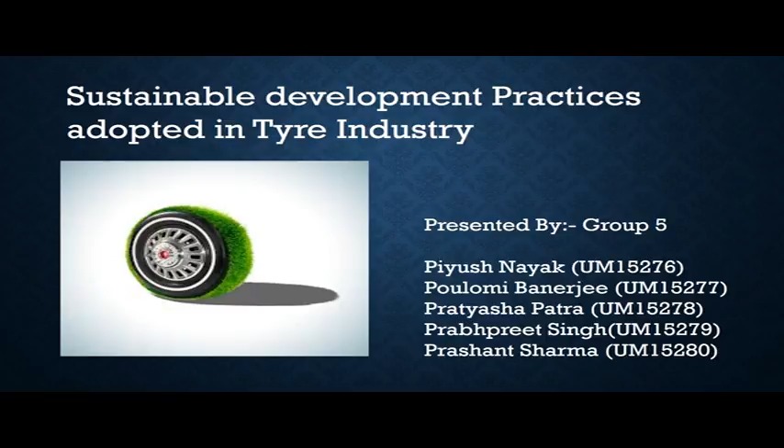Over 1 billion tires are manufactured worldwide across 450 tire factories in the world, and the major consumption of the tire industry is natural rubber. Their different uses are industrial products, conveyor belts, automotive products like fan belts, and latex products like rubber gloves.

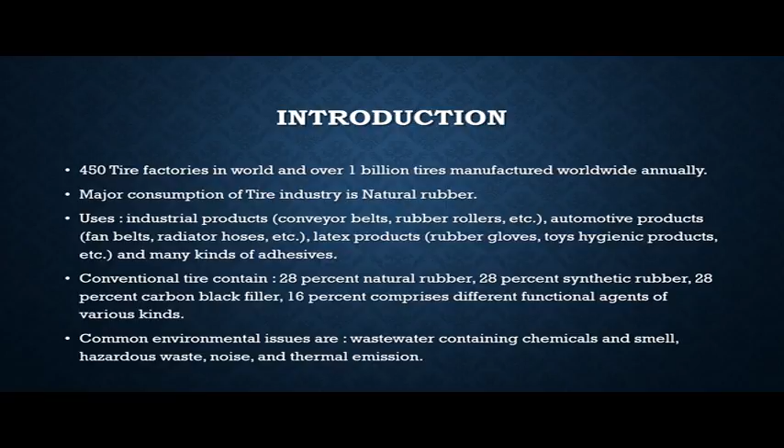The conventional tire contains 28% natural rubber, 28% synthetic rubber, 28% carbon fillers, and the rest are functional agents. The common environmental issues are wastewater containing chemicals and smell, hazardous waste, noise, and thermal emission. Different ingredients of the tire are rubber, carbon black, metal, textile, zinc oxide, sulfur, additives, and carbon based materials.

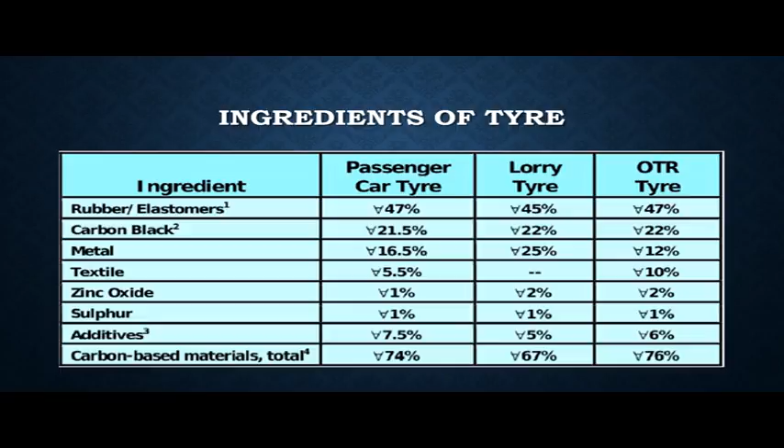Now talking about the life cycle of a tire, in the production phase we talk about the raw materials, their source, and the manufacturing process, and the key properties of the commonly used chemicals and their exposure scenarios, and the use of nanomaterials in tire manufacture.

In the tire use phase, we talk about the fundamental measurements of the tire and road wear particle, the distribution of the TRWP in air and their impact on water and soil, and the toxicity of the TRWP.

And then we go to the end of life where we talk about the different management practices like reduce, reuse, recycle - the 3 R's - and expanding it to the developing economies.

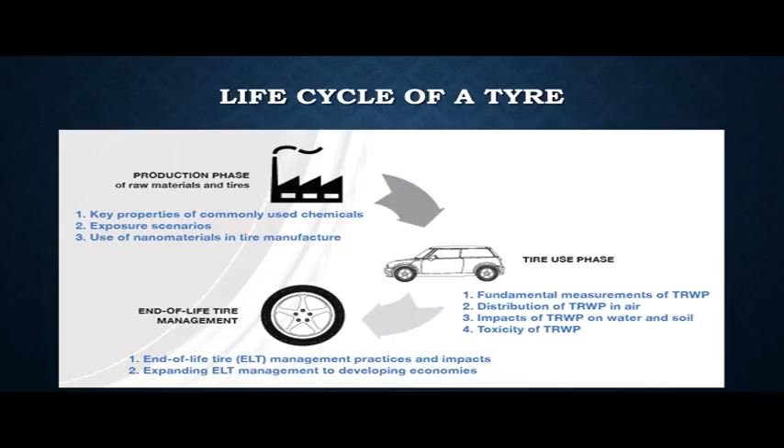Major areas which they impact are the production phase, where we talk about raw material sourcing, and the use phase, where we talk about tire and road wear particles and tire roll resistance, which affects energy use and the greenhouse gas emissions that result from it.

And in the end of lifetime management we will talk about reuse, where 85% of the reuse of tires is done in developed economies, which needs to be taken to the developing economy.

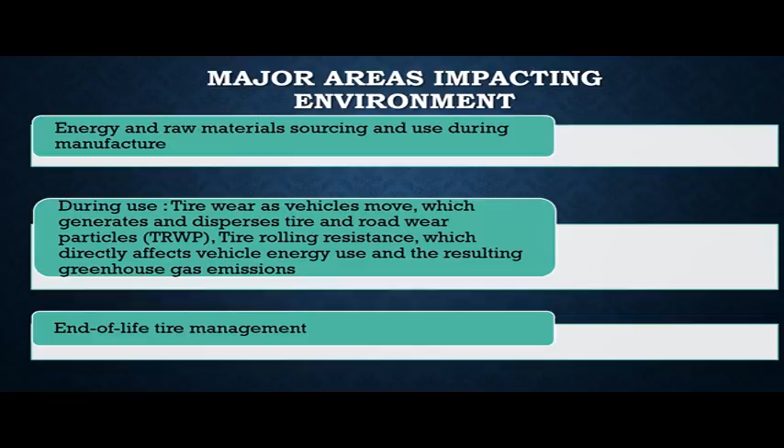Now let us come to the tire companies following sustainable practices. First is Apollo Tyres Limited. Apollo Tyres Limited India started its business of manufacture and sale of tires in 1972.

The company has its corporate headquarters in Gurgaon, India, and its manufacturing units in India, Hungary, and the Netherlands. It markets its products under two global brands, Apollo and Vredestein, and sells them over 100 countries through a vast network of branded, exclusive, and multi-product outlets.

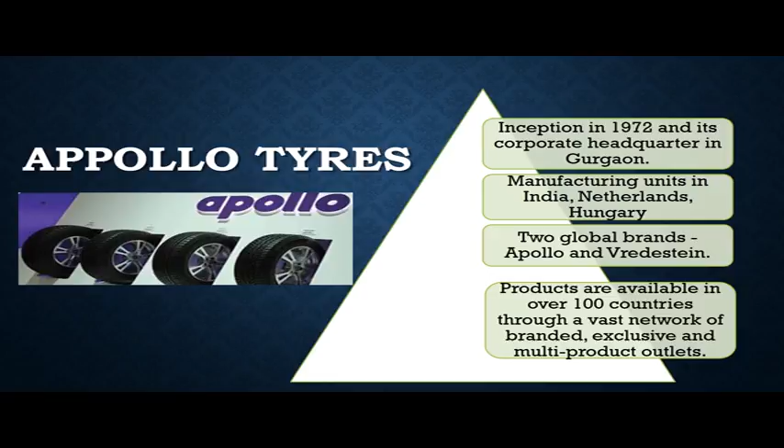Now let's come to the sustainable practices followed by the company. First is Green O Bin paper recycling. Under this initiative, they focused on conserving four key resources: energy, water, waste, and biodiversity. This initiative is run by the employees themselves. It also attempts to create behavioral change which goes beyond the workplace and leads to employees adopting it even in their personal lives.

Next is Apollo Radial Service Assistance. This aimed at engaging customers to optimize operational efficiency in their fleet. A specially trained and qualified person was allocated to the fleet to make standard checks like vehicle inspection, scrap tire inspection, inflation, etc., which led to enhancement in 15 to 20%.

Weight reduction: they have introduced a new product line, Quatrac 5, which reduces rolling resistance by an average of 10%. Reduction in rolling resistance leads to direct reduction in fuel consumption.

Next is green compound technology. Apollo tires have introduced a new tread compound with carbon black reinforcement whose performance in regards to rolling resistance is similar to silica tread compound.

Next is employee engagement on environment sustainability. A comprehensive employee engagement on environment awareness and sustainability program was designed in partnership with Centre for Environmental Research and Education. This program was aimed at promoting environmental sustainability through formal education and mass awareness programs.

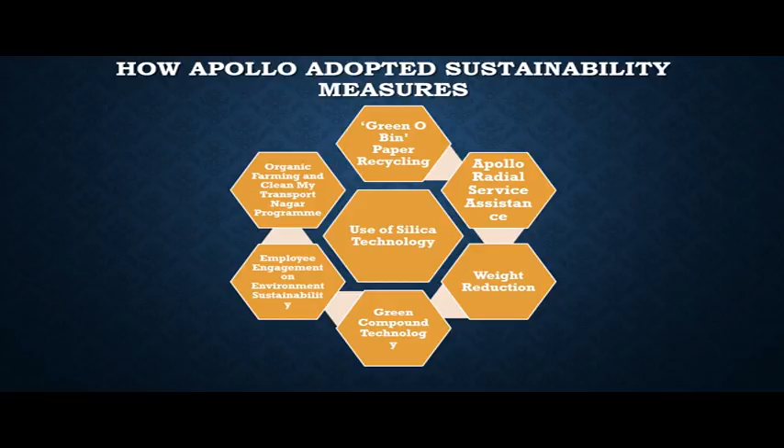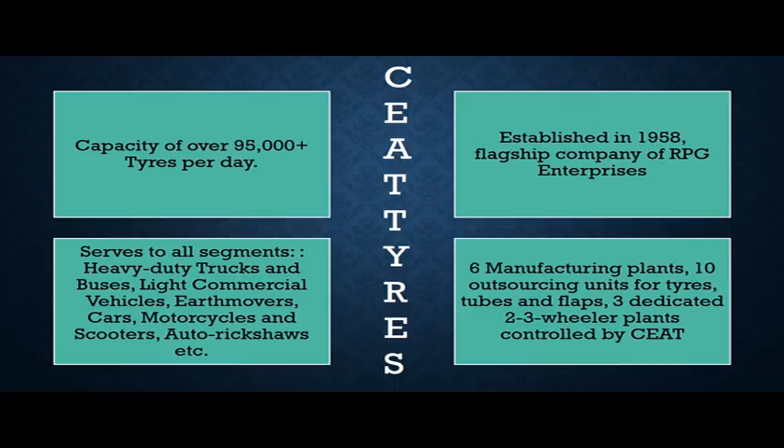We will be talking about CEAT Tyres and the steps it takes to make its business process sustainable. Considering that CEAT Tyres is the flagship company of RP Goenka Group, the kind of impact it has due to its business practices is quite significant. So let us just go through the steps that it takes.

It wants to utilize resources judiciously and optimize tire use by being environmentally responsible and create sustainability through eco-friendly products. They wish to have a safe business. They want to deliver safety by introducing advanced technology which will blend grip and control, and it will not reduce the tire life.

It would focus on developing materials and compounds which are essential for grip and safety, and try to do that by minimizing the impact on the environment. They will have a process development group to co-engineer the process and improve the design further.

Apart from that, they also want to minimize the utilization of petroleum products because they are the most harmful materials which can be utilized by them, and it is also non-renewable and has a huge carbon footprint. This is an endeavor of CEAT Tyres to take green steps towards their business processes.

They work very closely with world-class universities and research institutions, such that they utilize materials which are really modern and have shorter development cycles. Apart from that, they want to implement poka-yoke in their system to strengthen their process.

Poka-yoke is basically for a particular system. Now, poka-yoke cannot be implemented 100% because no system can be 100% error free. However, it can be reduced to a large extent. Therefore, they want to achieve various global certifications like OHSAS and TS 16949.

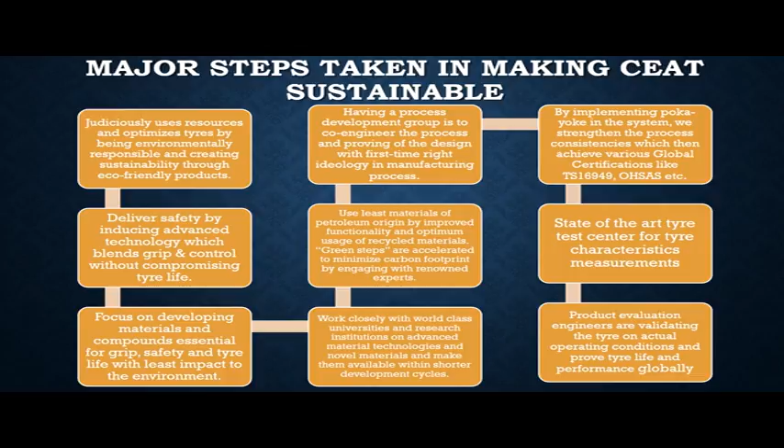Next, we're going to talk about Pirelli Tires. Pirelli Tires is basically a multinational company based in Milan, Italy. It is the fifth largest tire manufacturer in the world, and it has a network of around 10,000 distributors and retailers. It has 19 manufacturing sites located all around the world.

So how has Pirelli adopted these sustainability measures? It is basically through 4 steps. First, the carbon disclosure project, in which Pirelli has asked its key suppliers to join it in undergoing climate change performance monitoring via the project. Suppliers have managed to cut CO2 emissions by 116.5 million tons and also recorded savings of 793 million euros.

Second is the sustainability plan, which aims at increasing revenues from green performance products - in 2017 this equaled around 48% of tire revenues - by 2020. Third is the global stakeholder dialogue, promoted by Pirelli, which aims at gathering the expectations and feedback from major international stakeholders.

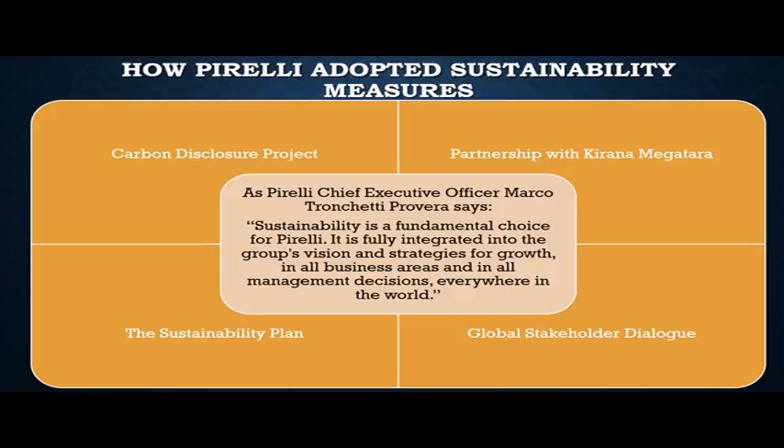Fourth, the partnership with Kirana Megatara, one of the major natural rubber suppliers in the world. Pirelli, along with Kirana Megatara, supports small natural rubber producers in Indonesia through process and product quality training activities, donation of high quality rubber tree seeds, and scholarships for their children. This activity produces social as well as economic benefits, fostering increased production and consequently decreasing deforestation by correctly exploiting the rubber tree growing in existing plantations.

After comparing what the Indian companies did in this front, we tried to find out the global companies and what are the sustainable practices in the tire industry. One of the hottest topics at the International Tire Exhibition and Conference, Tyre, held in October 2014 for tire manufacturers in Akron, was recycling scrap tires and the sustainable aspects of the industry.

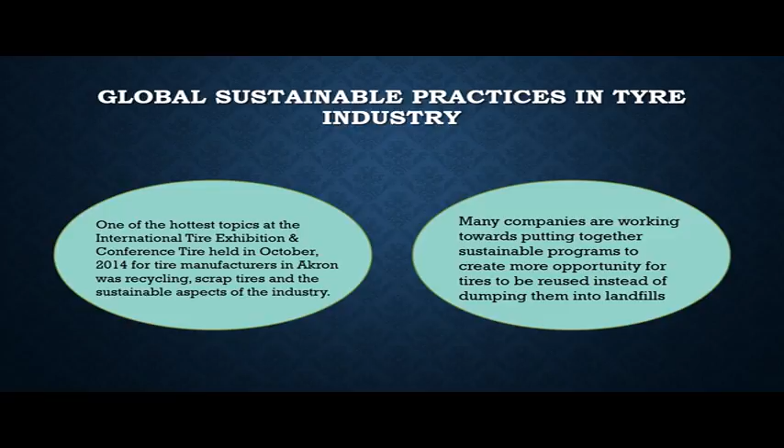Many companies are working towards putting together sustainable programs to create more opportunity for tires to be reused instead of dumping them into landfills. When we tried to find out which global company has done something in this front, we chose Lehigh Technologies.

Lehigh Technologies came up with the idea of manufacturing the greenest tire. Now, what is exactly a greenest tire and how does it help? Developing high value uses for end of life tire materials instead of just dumping them into landfills is what was coined as the greenest tire.

Now, why did Lehigh Technologies think of doing this? Because every pound of Lehigh's MRP helps save 10 kilowatt-hours of energy in comparison with traditional alternatives, and 40% of the carbon dioxide produced with traditional alternatives. So it was definitely a better method to save the environment from pollution.

Now, what did they do to come up with the green tire? In 2007, they started a worldwide campaign to increase the environmental contributions of the tire industry through the use of innovative, sustainable materials. Their goal was very ambitious - they wanted to manufacture 1 billion green tires on the road that would enhance sustainability. Well, 1 billion looks quite a big number, but finally in 2015 they achieved this major milestone.

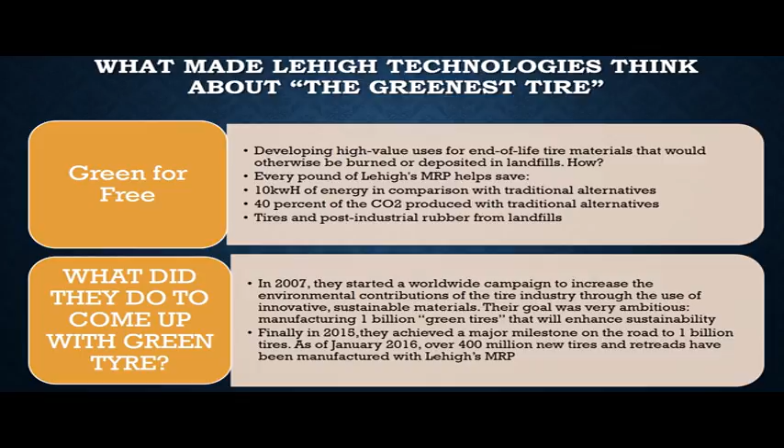And as of 2016, over 400 million new tires and retreads have been manufactured with Lehigh's MRP. So by 2015 their goal of achieving the green tire - trying to produce something new and getting up with a better alternative to help the end of life tire materials - was achieved, and by 2016 they manufactured new tires. Finally, what were the achievements?

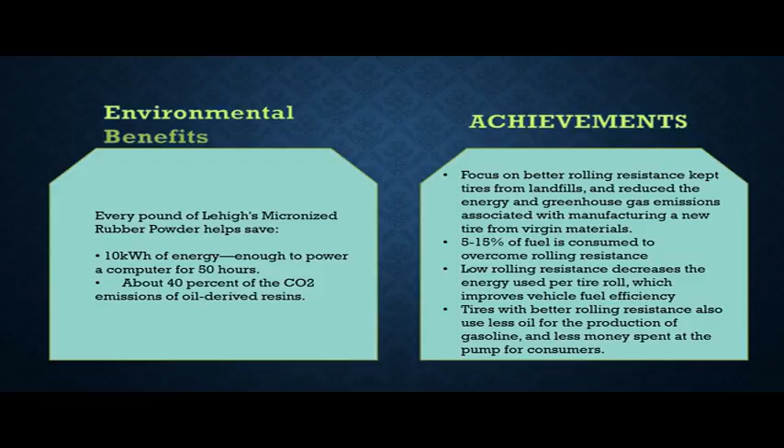Well, they focused mainly on better rolling resistance to keep tires from landfills and reduce energy and greenhouse gas emissions. Lower rolling resistance decreases the energy used per tire roll, which improves vehicle fuel efficiency. So tires with better rolling resistance also use less oil for the production of gasoline and less money spent at the pump for consumers, as fuel consumption is also decreased. So that's all. Thank you.